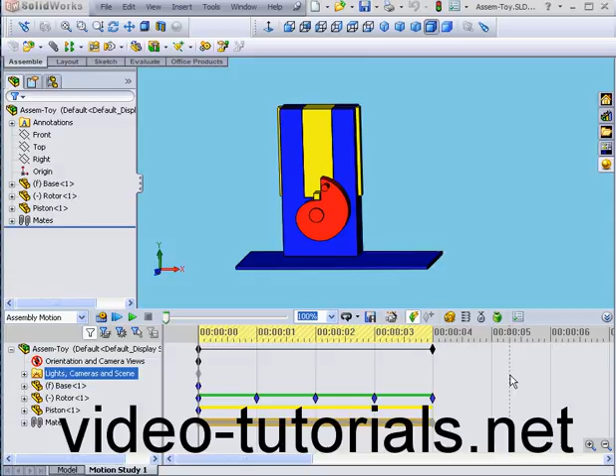Welcome to our tutorial on using angular mates. We're going to pick up where we left off in our previous tutorial with the toy. In this tutorial, I'm going to use angular mates instead of distance mates to rotate the rotor.

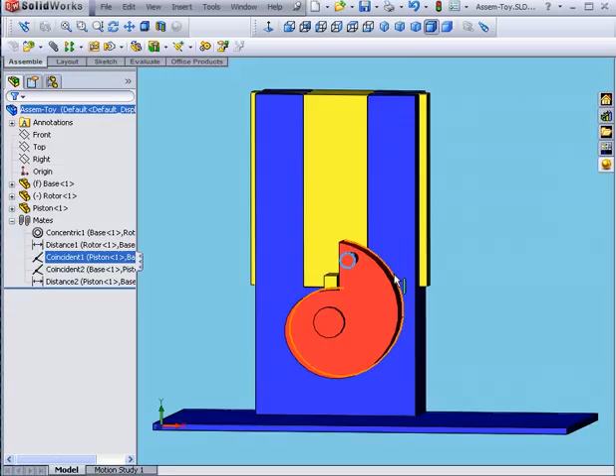Let's exit Motion Study and go back to our model. Currently, I have two mates for this rotor, coincident and distance. The distance mate is simply an offset between the rotor and this face.

I'm going to click Mate. Let's right-click and clear selections. I'm going to create this mate in a way so that the initial rotor position is 0 degrees, and then it'll move to 90, 180, 270, and 360. It's easy to do this way, and it's less confusing for SolidWorks too.

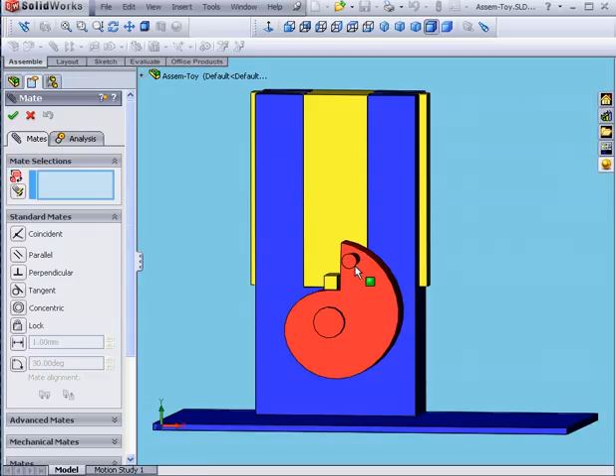I'm going to select this face, and then this face. Now we select Angular Mates, enter the value at 0 degrees, Tab, OK. Next, I need to check the angle calculation clockwise.

Basically, I increase the angle value, and the rotor moves in a clockwise direction. If that's not the case, simply check Flip Dimension. Let's go back and enter a value of 0, Tab. At this point, I'm ready to click OK, and OK.

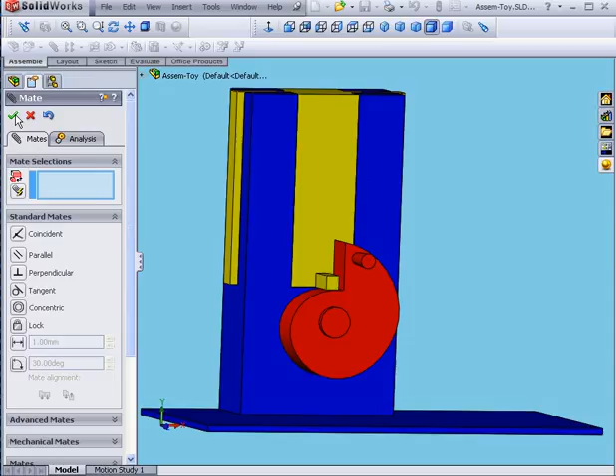Let's return to the Motion Study tab. SolidWorks asks me if I want to update the time 0 keys back to valid positions. Let's click Yes. Previously, the key was red. Now it's blue.

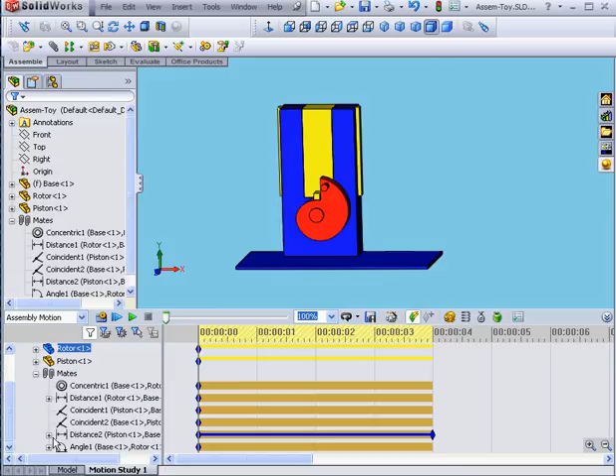Let's highlight our key points and delete them. Next, expand the Mates branch. Here's my angular mate. Let's bring the time bar to the 1 second mark.

Double-click on our angular mate. Let's move the slider to 90 degrees. OK.

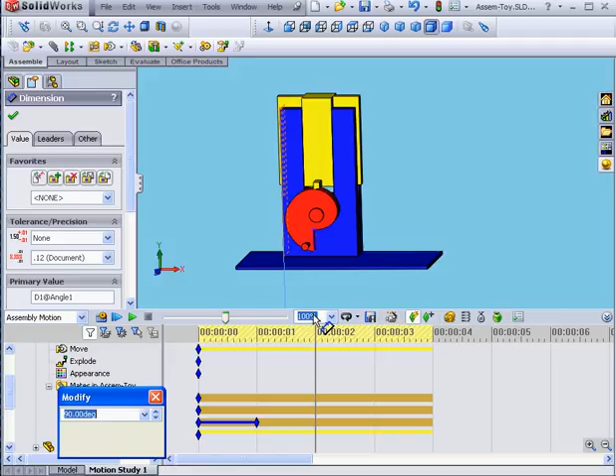Let's drag our time bar to the 2 second mark. Double-click on our angular mate. Move the slider to 180. OK.

Now let's move the time bar to second 3. Double-click on our angular mate. Slide up to 270 and click OK.

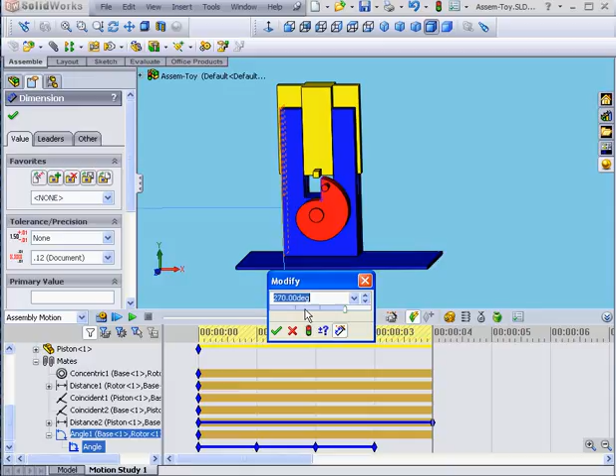Our last move is at the 4 second mark. We double-click and move the slider to 360. Let's click OK. Now let's calculate.

Here is our preview. Everything seems fine. Let's press Stop.

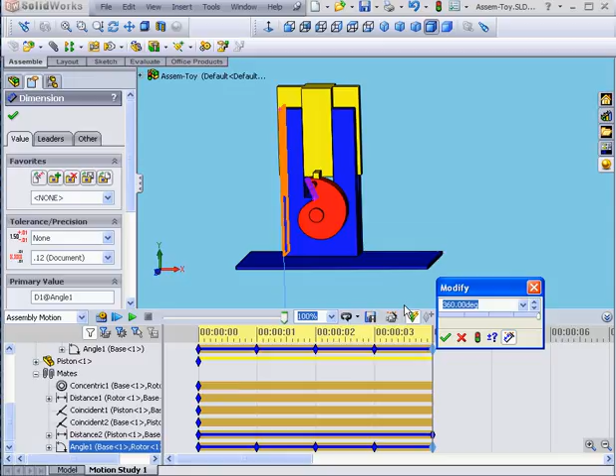In a situation like this, it's important to watch for this particular problem. Let me double-click. 360, as you see, is actually equal to 0 degrees. But if I put in 0 and click OK, let's recalculate to see what happens.

Let's press Stop. You can see that the rotor doesn't move consistently in one direction.

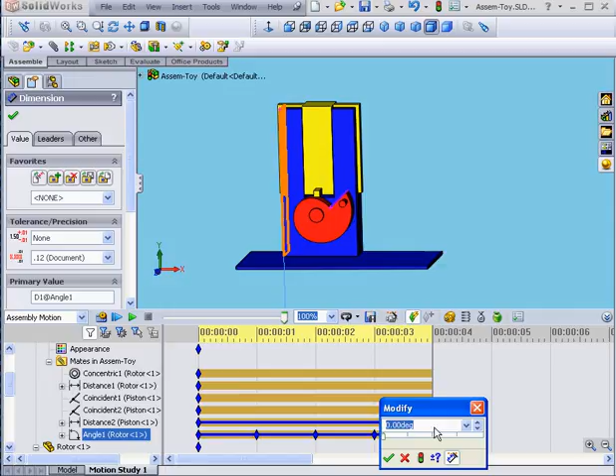Let's return the value to 360 degrees. Double-click. Move our slider up to 360 and click OK. Now let's run our calculation.

Each time you make changes, you need to make sure you run the calculation. Now everything appears to run fine. Let's click Stop.

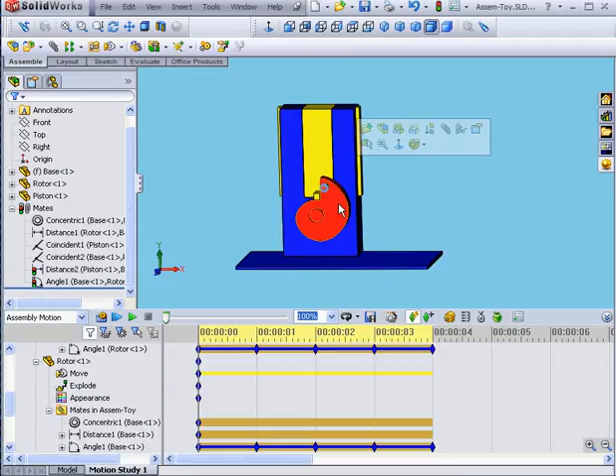For the initial position, if I'd used this face, for example, it would have made the initial angle 90 degrees. I'd need to have calculated starting from 90 degrees, then 180 here, 270 here, 360 here, and back to 90. Unfortunately, this probably would have confused SolidWorks, and we would have ended up with some similar inconsistency in our animation that we just saw when I changed the value from 360 to 0 degrees.

You need to watch for these types of issues when using angular mates. In a situation like this, I could have simply used 2 key points at 0 and then 360 degrees and no intermediate points at all.

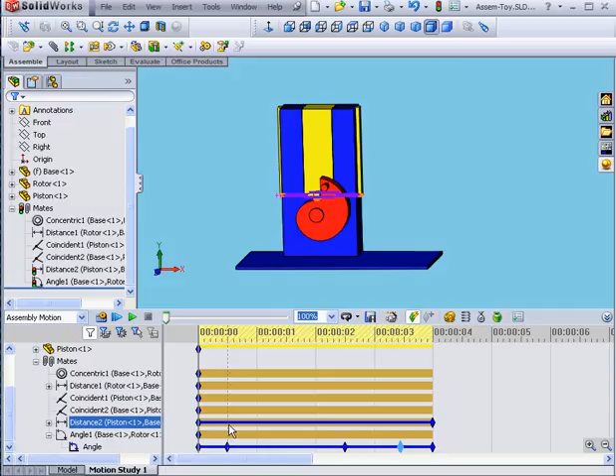But they are useful, for example, if I want the rotor to move at, let's say, different speeds. Of course, in order to match the piston movements, I need extra key points in the distance mates change bar. I'm going to skip this for now and click Calculate.

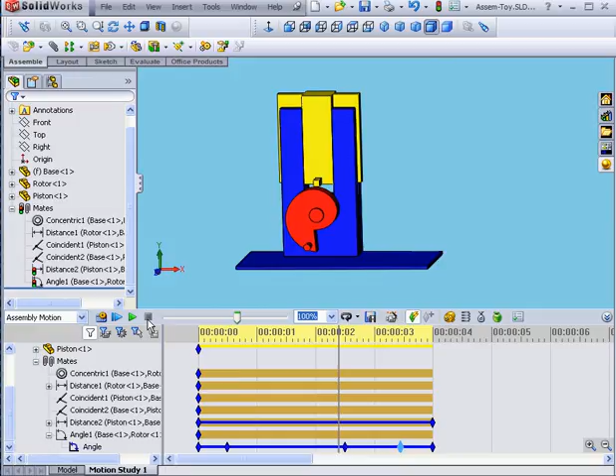You see now that the rotor moves slowly, and then it speeds up. However, the movement of the piston doesn't match the movement of the rotor right now. Let's click Stop, and this concludes our tutorial on using angular mates.